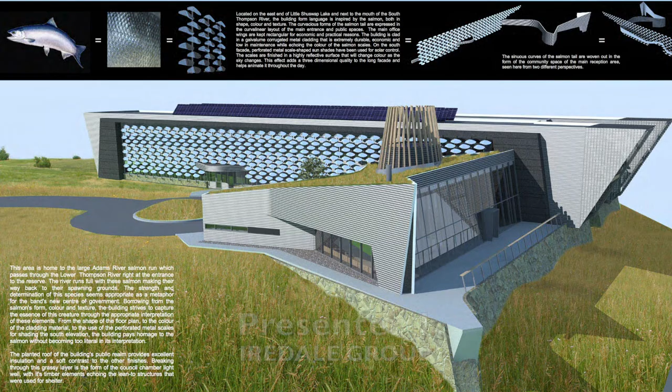I've been working with First Nations for a quarter of a century now. I'm much older than I look.

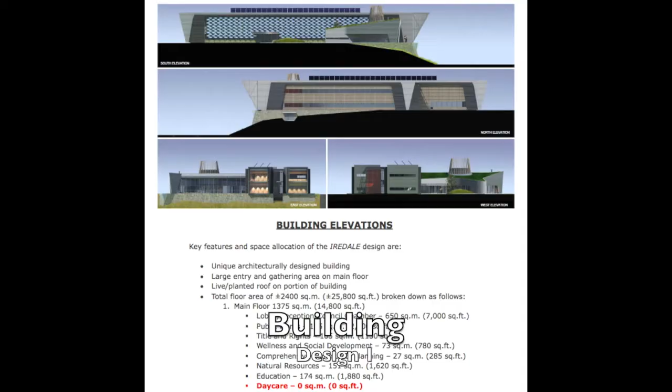We always look for means to develop buildings that have meaning, that are rooted in place, that actually resonate with the community and are drawing their inspiration from something that is particular to that site, that area, and the people. And so when we came to Adams Lake, obviously here close to the mouth of the Thompson River, we all know what the Thompson River is known for, specifically this area.

There's a huge salmon migration up here. What we wanted to do is draw some analogies from the salmon and utilize some of that in how the building took shape, whether it was the form of the building or the texture of the building, the color of the building, anything that we could take and adopt from that.

The picture at the very top, what you can see, there's a black line across the top of the sheet, which essentially illustrates some of the concepts we developed from a salmon.

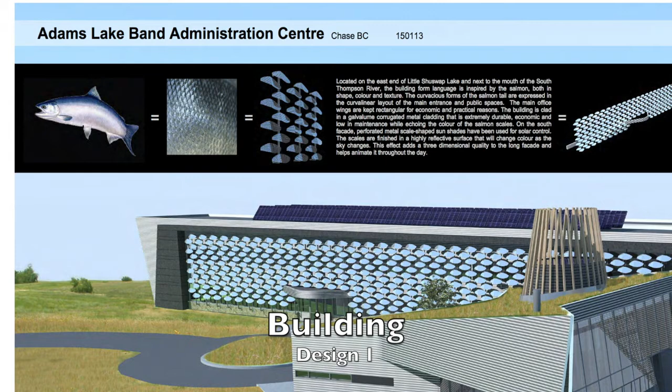And so an administration building is really, it's a bunch of offices and meeting rooms and so forth. And so we have to be in a way very practical about how we lay it out. We have to recognize that in order to be constructible, it has to be fairly straightforward. It has to be essentially in this regard a long box.

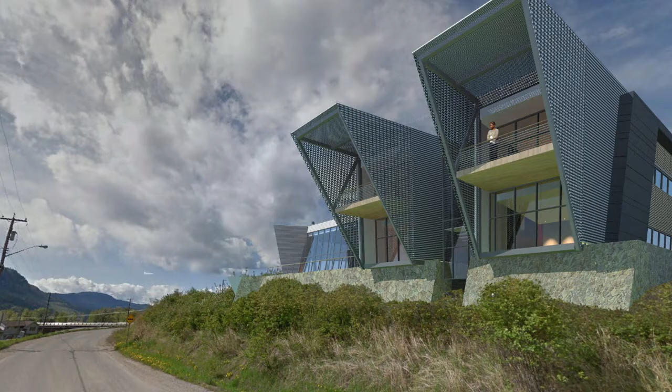And so what we did is we created 2 long boxes that would house the offices, and then as a way to sort of provide some dramatic effect to the building, we created the main entrance to the facility, as well as the council chamber and sort of the main lobby, as this fin that sort of comes out. So we're borrowing from the salmon's sort of sinuous curves.

What we're doing here is the long boxes you see, that represents the offices. And so we thought that most of the building would have to be fairly straightforward, otherwise it becomes way too expensive. And then we would limit any sort of curvaceous form language to the main entrance.

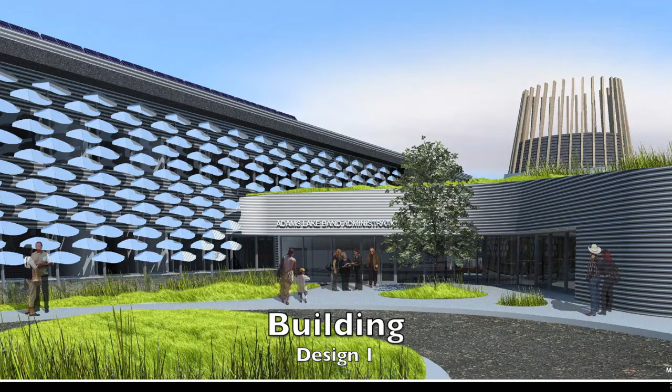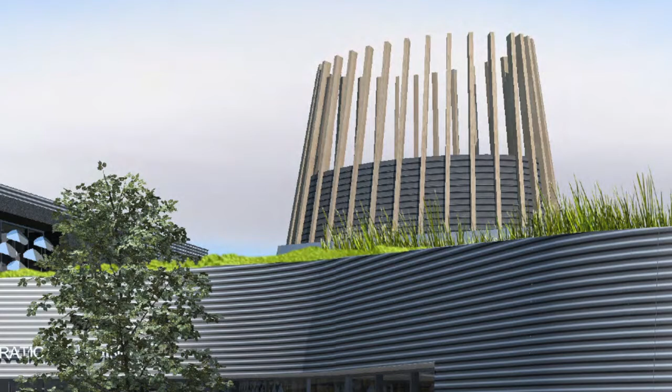And so coming out of the main entrance, and this reverts back to the idea of the subterranean shelters that were fairly common, we're suggesting a sod roof, a planted roof over this area, and then a big skylight coming through, essentially letting light down into the council chamber.

And then, of course, we thought, well, it gets very hot here, as you know. And so we thought, how do we, in a way, simply create a sun-shading device that can reflect perhaps even the scales of the salmon. And so we looked at perforated metal screens. We just bent them in half. And then we put them on vertical sticks, basically on the south side of the building, that shades the whole building from summer heat.

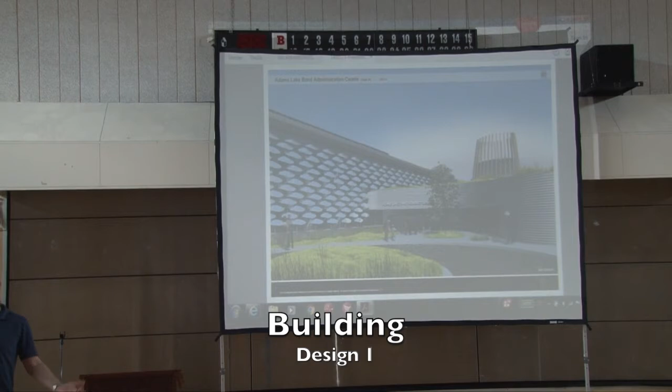Now, obviously, site-specific built buildings are going to be more expensive, and we recognize that. But we design our buildings to last 50 to 100 years. And when council first essentially retained us to come up with this concept, they wanted an all-wood building.

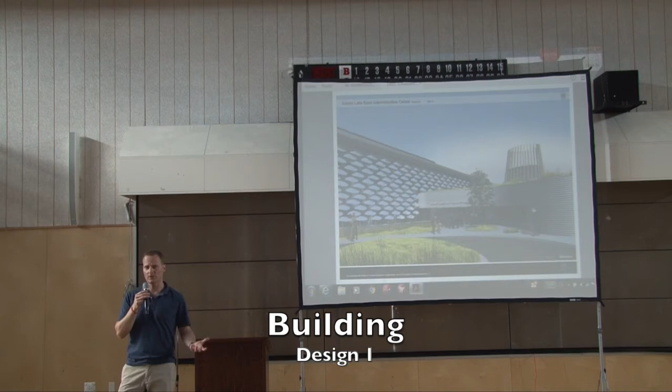And obviously, that's a big push in our province. But we're also very concerned about not giving you something that's going to require a lot of maintenance. And so we are very conscious of cladding the building in materials that were just really, really simple and really durable.

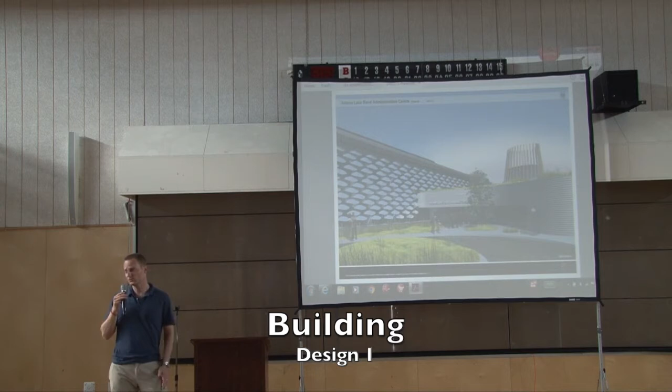Maintenance becomes a really big issue when you have a big building. Obviously for a house, you end up maybe staining it every 10 years or so, but on a building of this size, you really need to think of that. You want something that's not going to be labor intensive.

What this sort of shows you is it sort of shows you the south elevation there. And that's where we wanted to obviously really display, because that would be the main facade you would see as you approach the building. So that we wanted to have the greatest effect, the dramatic effect. So when people are coming to do business, they see a building that is unlike anything else, and it's sort of very specific to this region because it makes obviously some references to the salmon.

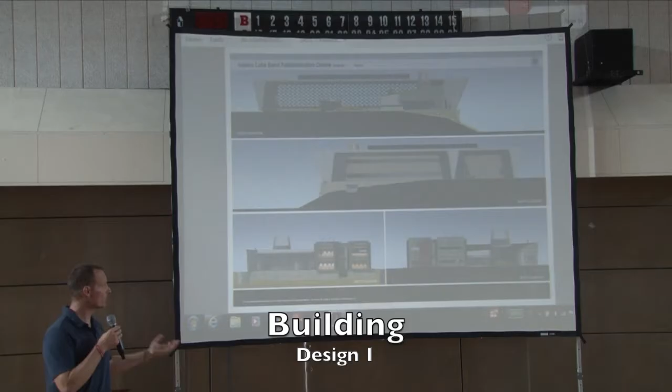So that's sort of what led us in that direction. And then go to the next slide.

Just trying to figure out which order they're in here.

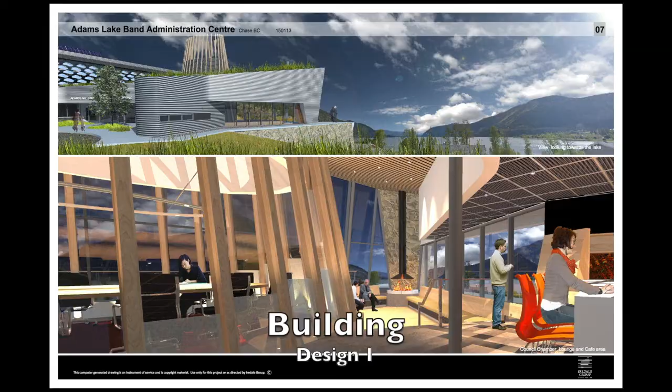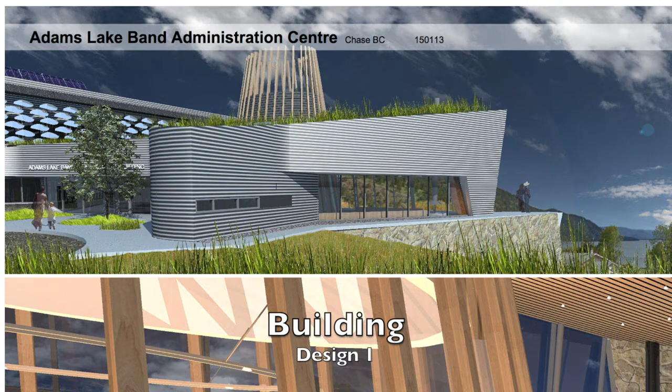On the top there, you can get a sense of what that view would look like overlooking the lake. The building was oriented so that all the public meeting rooms and the chief's office would be located out towards the lake, so everyone would share in that great view.

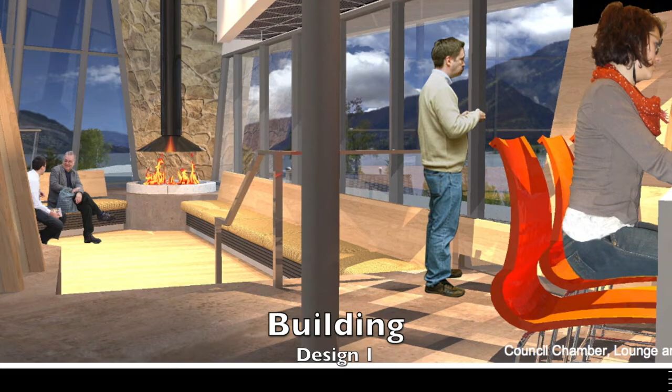At the bottom, the mandate was to provide not only a council chamber, but also a lounge where people could gather for informal dining or get-togethers, with a kitchen off to the side. That space was also oriented towards the lake for great views.

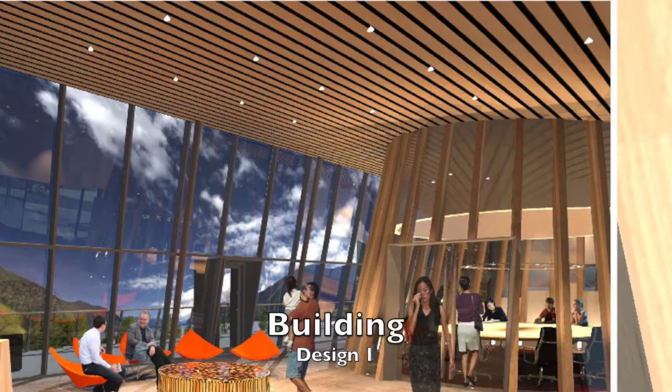Next, this shows an image of what the council chamber could be like, making it high enough to borrow natural light but not direct light down onto the surface. This is an image of the lobby and reception desk.

You can see in that lower photo how you would have glass just opening up right across the lake.

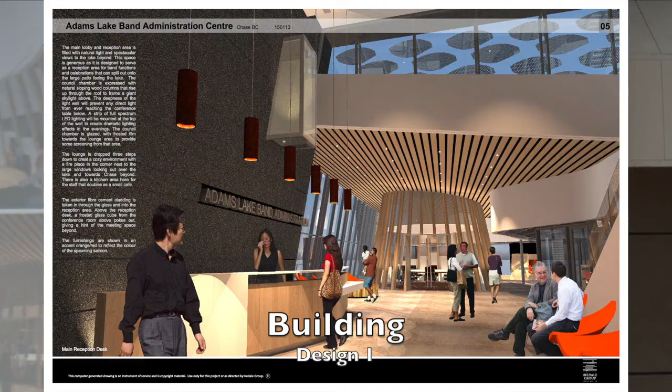This is looking at the reception desk and a glass bay out from the meeting rooms above, then a staircase up, and you can see the council chamber, which we concealed within this colonnade of wood columns.

Very open. Here's an image of what it might look like at the bottom of Lakeview Road - these long shoe boxes coming out, with corrugated perforated metal on the ends to protect them from the sun and give them a little more dramatic flair, as opposed to just a box hanging out at the end.

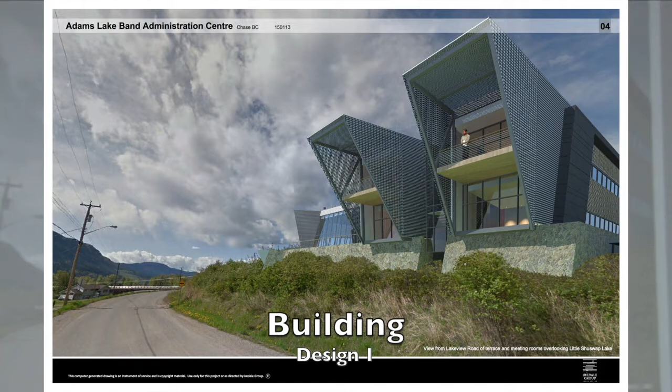We thought we'd put it all on a nice stone base so there's a patio out there, so if you ever had functions you could spill out onto that, overlooking the lake.

You have to think about how these spaces might be used and how they could take most advantage of the site. So the floor plan you can see here is the orientation of the building.

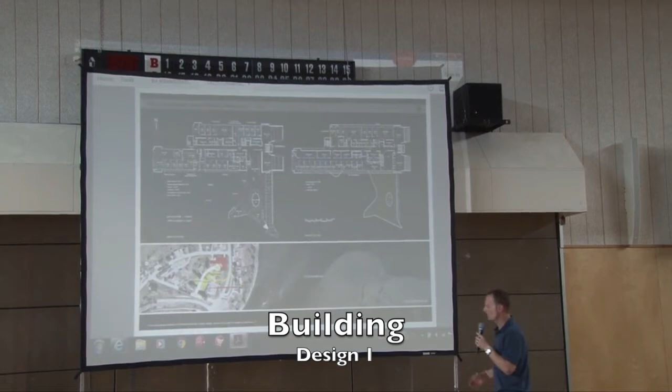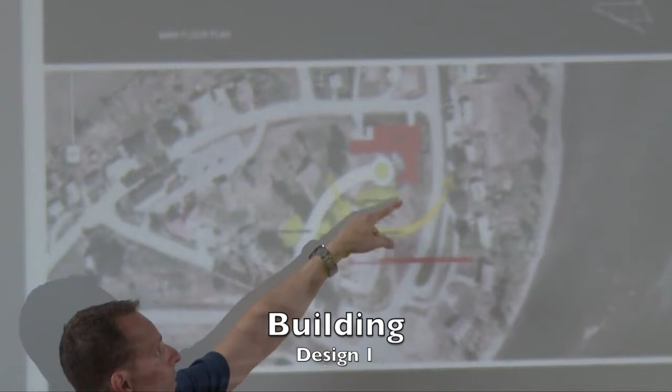The intent was that here's the current administration building, so we'd drive through to provide parking here and there, and this was the one area we identified as possibly free of any grave sites, which was the reason for locating it at that point.

Because of the slope, it also allowed us to provide easy access into the mechanical room and deliveries and storage straight in off the road into the basement, which is very handy.

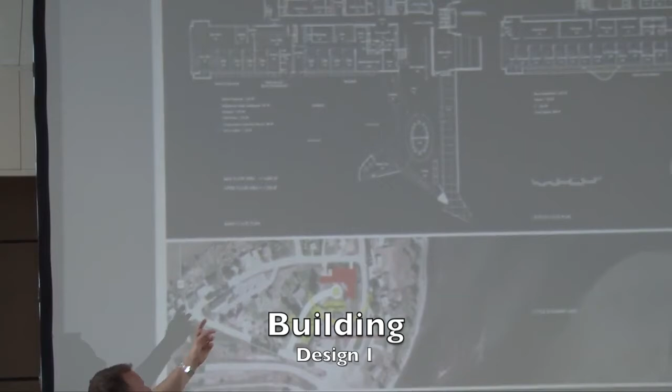Above there you can see the floor plans - two long boxes. They could even be phased depending on how much you wanted to build at once. In that regard, the building is quite easy to extend, elongate, add to, or even subtract from.

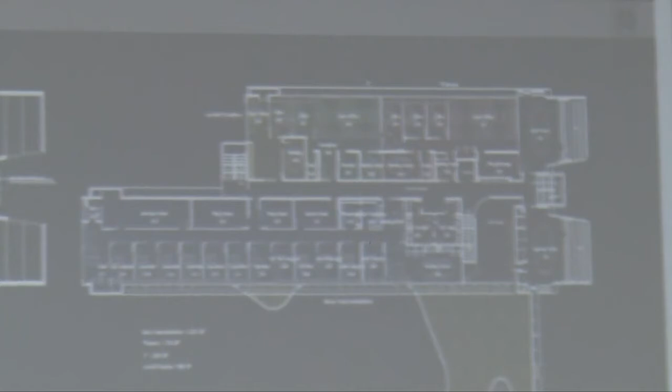And then this being the main lobby entrance area, council chamber, which becomes more organic, again referring more to the sinuous curves of the salmon.

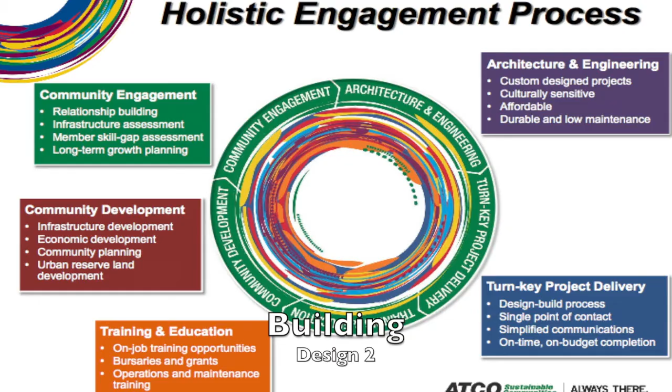I would hope that if we were successful building the band administration office together, going forward there's obviously going to be more buildings you guys need. There's going to be more infrastructure, whether it's commercial development, a gas station, or housing, we can help you with that. We have a whole process that fits with your culture and community, and we'll make it work.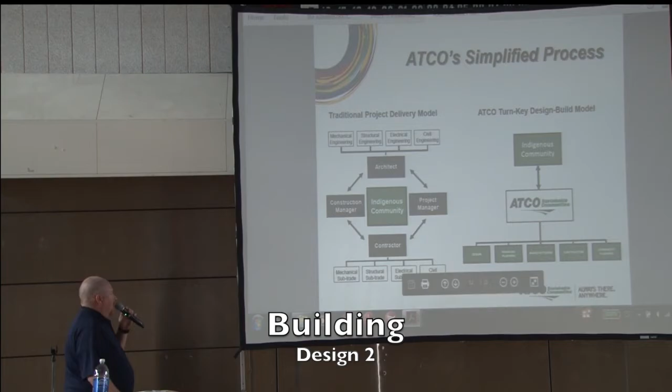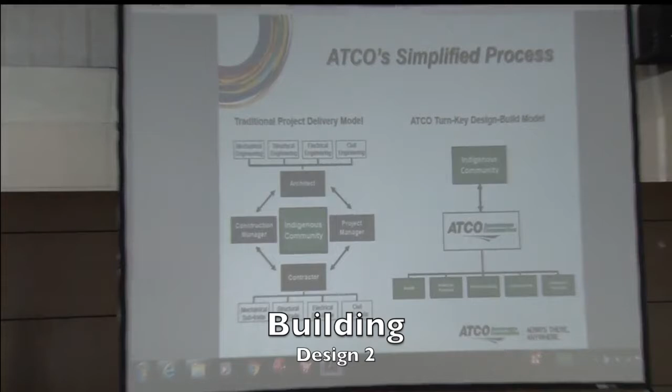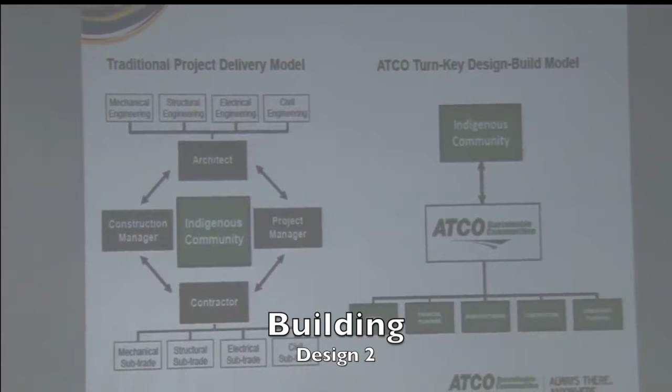This is one of the things that's important to us. When you deal with us, that's who you're dealing with. We're going to look after the design, the financial planning, the manufacturing, the construction, the community planning. If this is a project you take on your own, there are so many variables and sub-trades to deal with, it can be overwhelming and things can fall through the cracks. That's why I think ATCO Sustainable Communities, as a single point of contact, can make the process incredibly easy for you. These are basically everything that we offer.

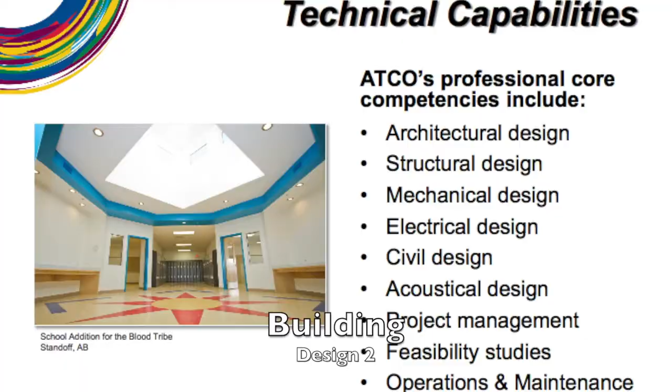Architectural design, structural design, mechanical design, electrical design, civil design, acoustical design, project management, feasibility studies, operations and maintenance. Keep that one in mind, operations and maintenance. A lot of people, when you build a building, there's operational considerations and monies that have to be spent over the years. You have to be very aware of that because you have to find the money somewhere, so you have to plan for it and be ready for it, and we can help you with that.

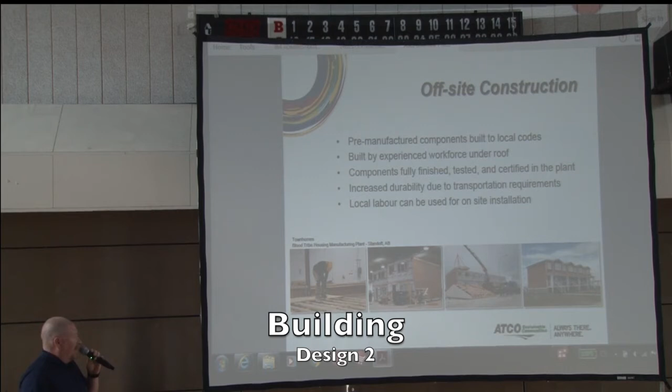One of the keys with us being modular is pre-manufactured components, built to local codes and the design specifications we agree on. We have a very experienced workforce, all under one roof. Our components are fully finished, tested, and certified in the plant. They're built to a higher durability standard because we have to transport them on trucks, so that's going to get us higher quality and a longer lasting building.

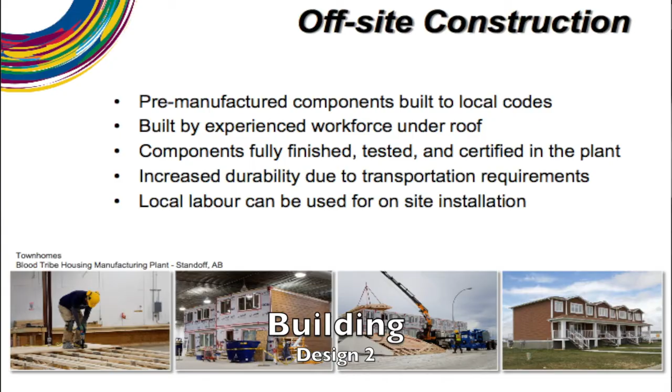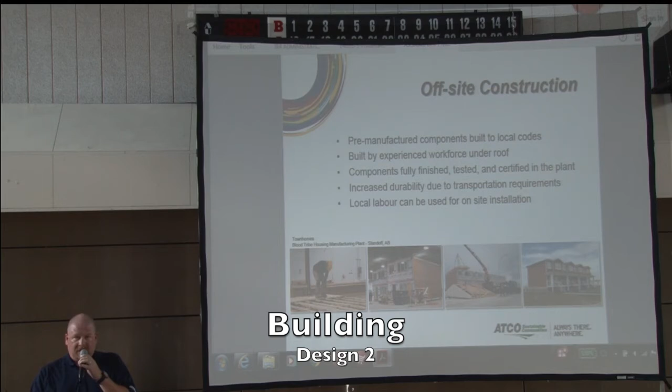One of the other things we truly believe in is using local labor. We're very interested in doing a community assessment with you to find out who's available to work, and we'll do a skills assessment.

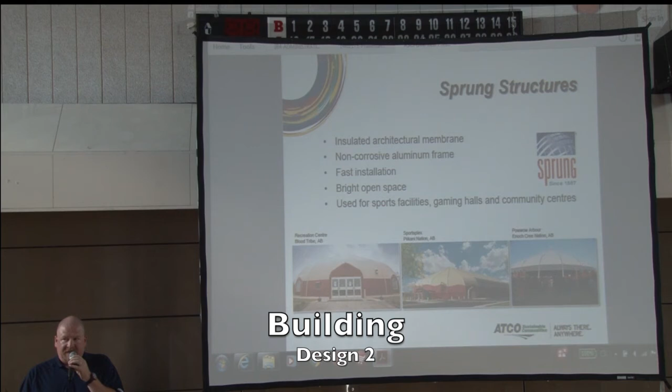In case there's interest in a sprung type structure, we have a joint venture with Sprung out of Calgary, across Canada. Any First Nation who builds a sprung facility on their land, it comes through us. We've done a few, and we're currently finishing a hockey arena for the Piikani Nation, just south of Calgary. I think that's opening pretty quick, it's a pretty exciting building. That's on our website if anybody wants to have a look, it's quite a process.

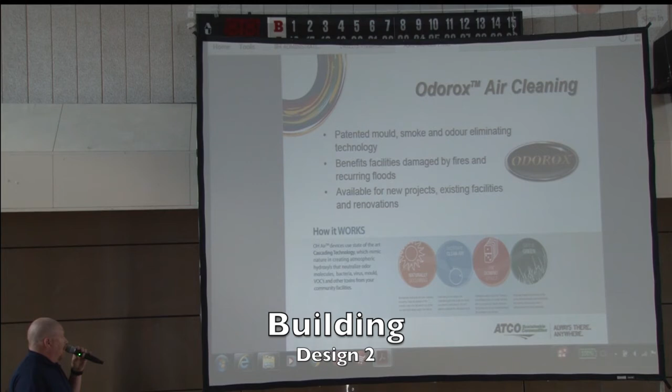Just some of the extras we have: an air cleaning system which we can incorporate into the building, and a mold remediation product that will help us stop mold before it happens, because I know it becomes an issue.

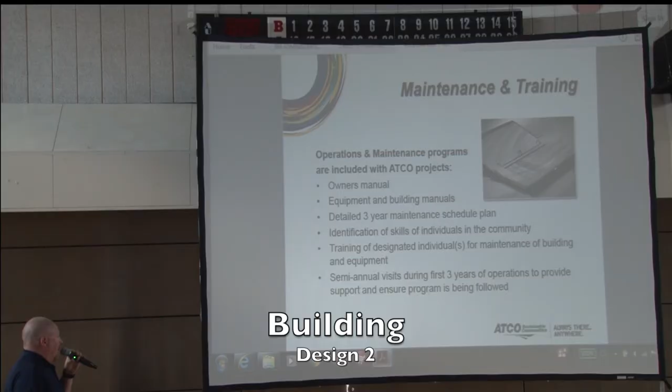Again, maintenance and training, we're big believers in that. We're going to provide you with a detailed maintenance plan and a book so they can go through their daily tasks, weekly tasks, monthly tasks, which is very important to the upkeep of the building.

So again, just to recap: holistic engagement process, a turnkey approach. We have a wonderful celebration and give you the keys, and you're going to have a building that operates the way you expect it to. We want to spend time with you so we understand the community's needs and values, and incorporate those into the process. That's very important to us.

Prefabrication methods give quality and reduced time schedule, reduced weight, and operating and maintenance as we talked about. You get warranty support of a major national company who's going to be here for certainly well beyond my lifetime, and probably most of the people in this room, so we don't have to worry about that.

And that's our recently passed founder, Mr. Ron Southern. So I think that's pretty much it for our presentation.

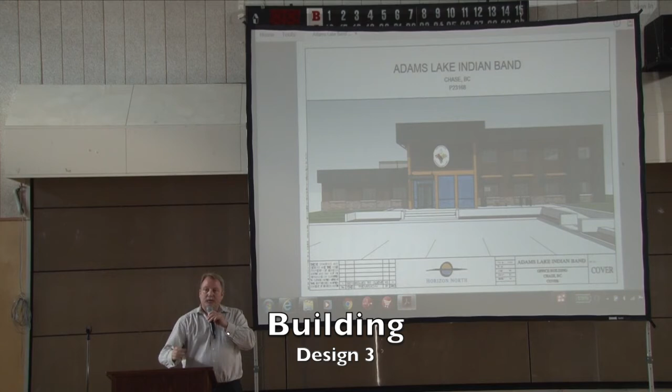Horizon North, I've only been with them a short time, and in that time I found them to be very accommodating in a lot of ways, as I'm sure you guys have found in the dealings you've had with them in the past.

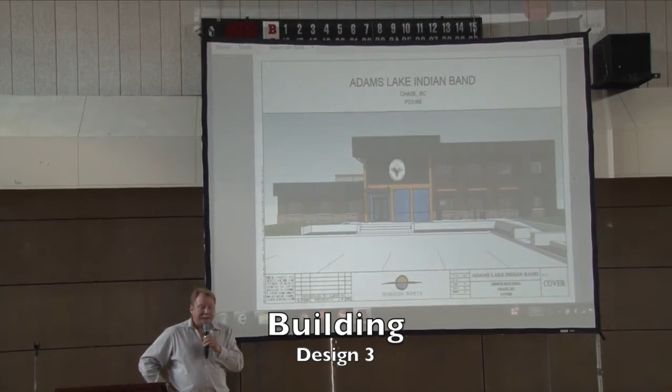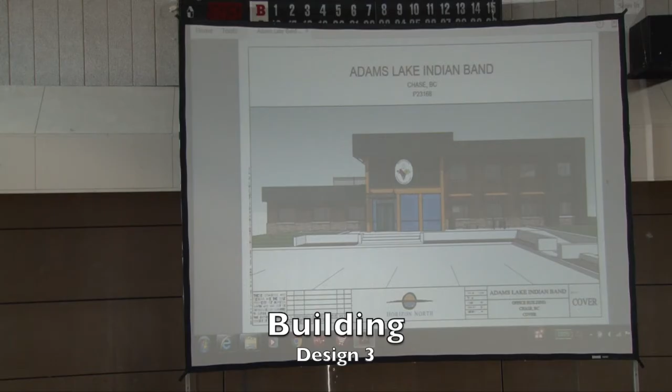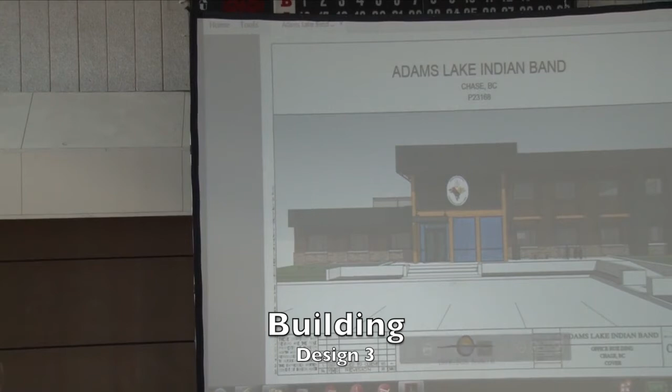So what I wanted to talk to you about today is the building that we had proposed to you. This is it here, this is what the outlook would look like. It has 67 offices, 37 cubicles, 6 boardrooms, 5 bathrooms, and a lounge. Inside that proposal we had it completely furnished for you as well. If you can see on the left-hand side, we actually proposed a patio out on the top of that terrace there. So you have that option if that's something of interest to you.

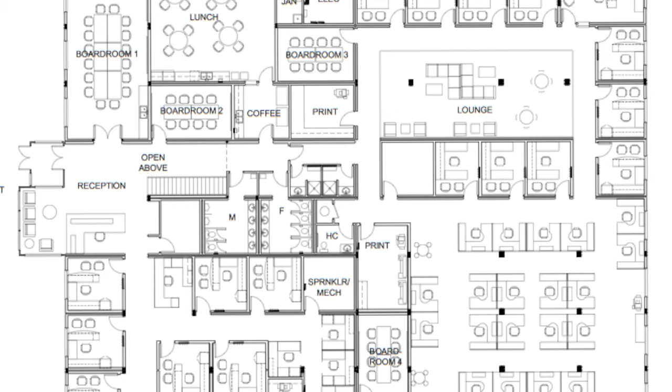If you scroll to the next slide - so the entrance, this is just the layout of it, the entrance and the layout of the main floor. We are local - for those of you that don't know, we're in Kamloops, so we're pretty local to you. We do source some of the product locally as much as we can. Briscoe is where we've used our LVL for our stairs going up to the second floor, so we try to source local as much as possible.

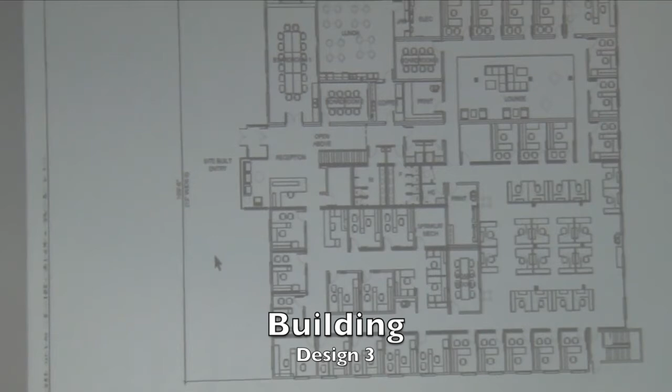As my colleague said from ATCO, the nature of modular construction is two things. It's stronger because we have to transport them down the road - the way we build them for transport, we've literally flown them in helicopters, dangling off the helicopters. You can never do that with a site-built product. So we really want you to understand that the strength is there, the quality is there, because we have quality control checks that go right through the assembly line.

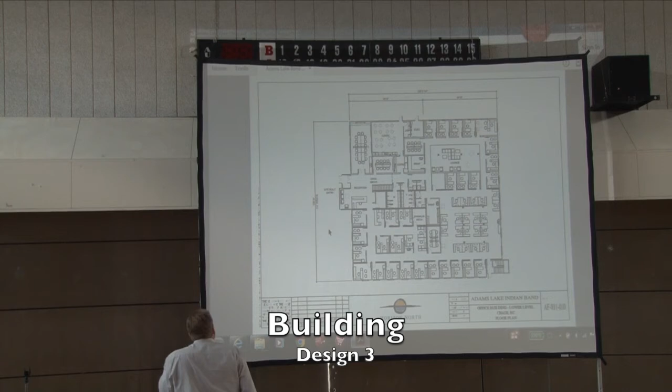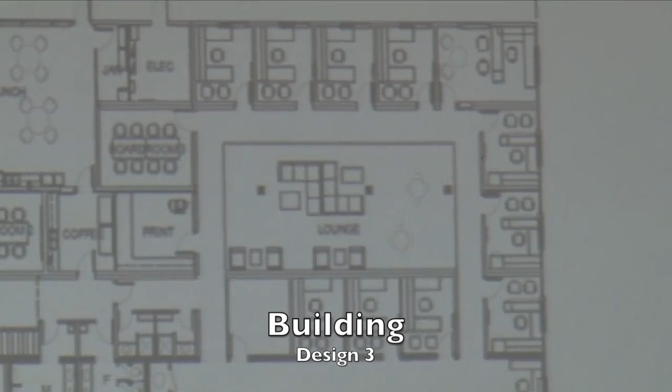He also talks about mold remediation a little bit as well. One of the things you really need to understand is, because it's going through a factory, it doesn't get the climatic weathers that site build does. We wrap it as soon as it gets to the end of the line - it's all tested, wrapped, and then shipped out for transportation. So it's not susceptible to fluctuations of water, snow loads, and absorbing into the wood. We don't have to deal with those issues as much as site build does. So those are some huge benefits when you're looking at your office space.

Can you go to the next one? So up here, the stairwell going up - that's where we talked about putting in a patio for you that could be overlooking the water.

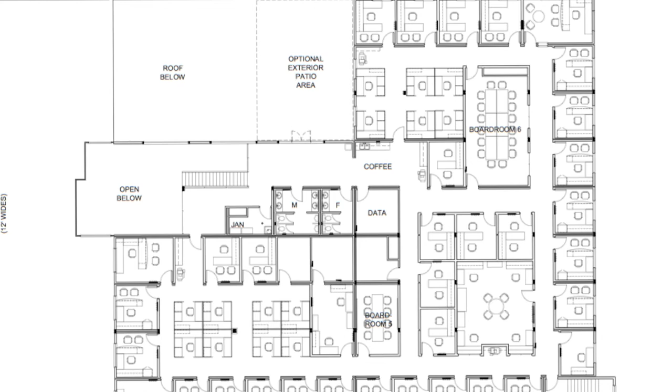This particular building that we built is similar to it - we have some brochures back there for you guys to have a look at and take away. It's similar, but it's not the same. Last year, in 2015, we won the Best Building Award from the Modular Building Institute for all of North America, out of 14 entries, selected by our peers for 27,000 square foot or larger buildings. So we're pretty proud of that award.

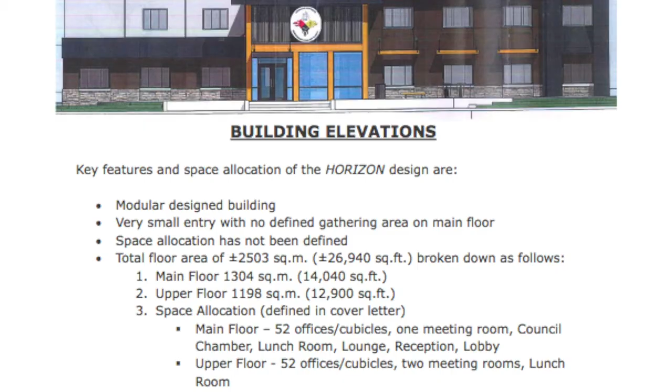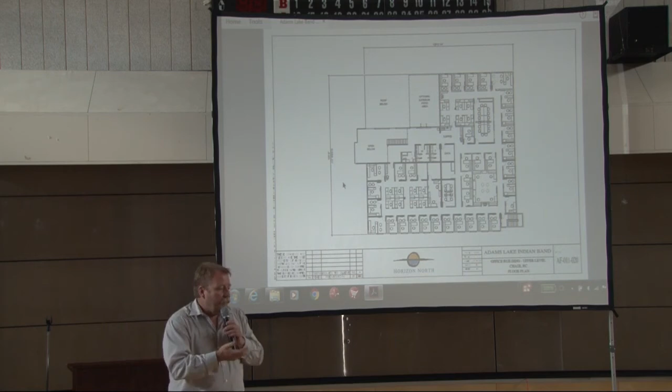I'll wrap up here and try to stay on time for you. If anybody would like to tour our facility in Kamloops, we would absolutely love for you to come through - just get a hold of Sheila or myself and feel free to come tour the facility, have a look, feel, touch, see what it looks like. From there we would build it to your requirements. We have a complete integrated system - a design team, manufacturing facility, transportation with our own trucks and trailers, and our own installation crew, so we can take it right from conception to completion. Being partners, we'd want you to have input on all aspects.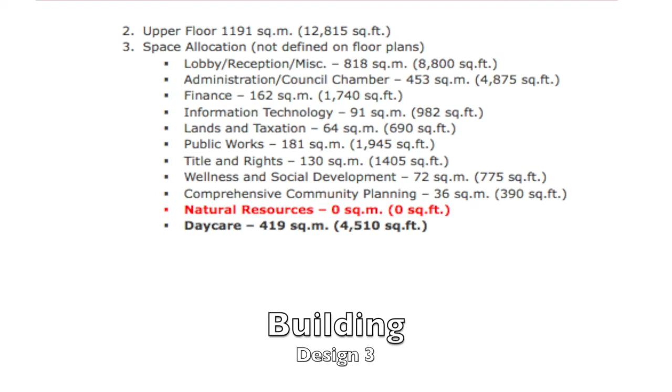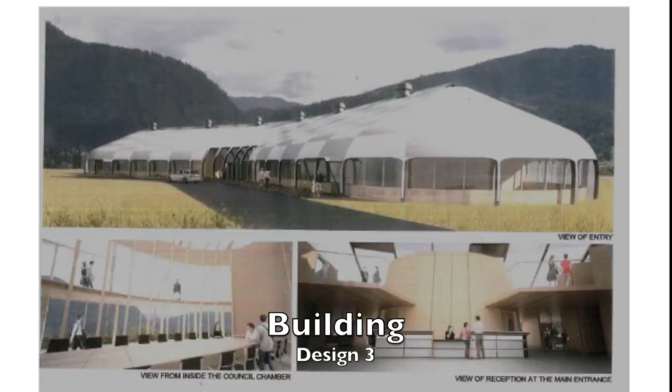The company paid for us to fly over - myself, Mary Ann, Henry Anthony, Howard Nordquist, and Hat Pooley. They toured us on their buildings in Saskatchewan and one in Calgary. We spent one night, did about 4 flights in a day and a half, and came back. Unfortunately they don't have the presentation, but they have a similar design where you can move anything around and configure the inside of the building however you want. The only thing missing would be the natural resources building inside that. The roof was guaranteed for 25 years, so you can put lights and skylights up there too.

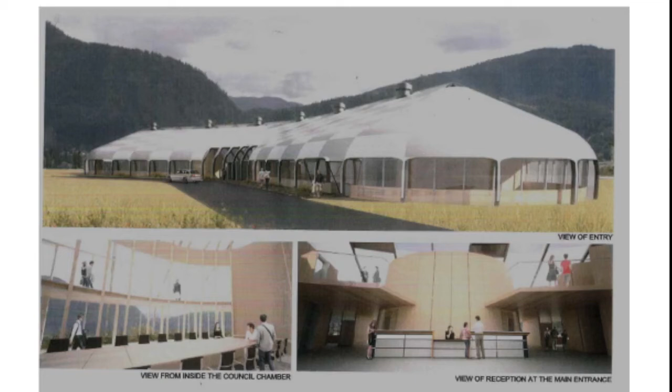They left us information, so if you want it you can look on their website, we can provide that as well. It's too bad they're not here to ask questions of, but we can get a hold of them. Thanks, Jeff.

So what we'll move into next is the different building sites. We'll have Iva and Keaton give an overview of all the sites that we looked at, part of the original design at the corner of Lakeview and Village.

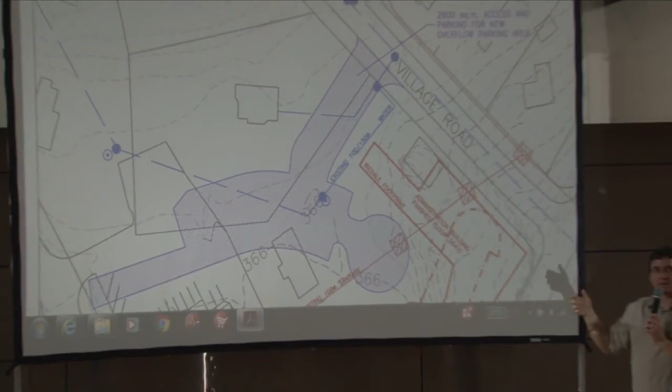Again, this is a detail of option 1, and I think since this initial design was done, they've done a ground penetrating radar survey. I think a lot of the area in purple, and even part of this building site, has been identified as very highly significant, so there was concern that there would be issues building there.

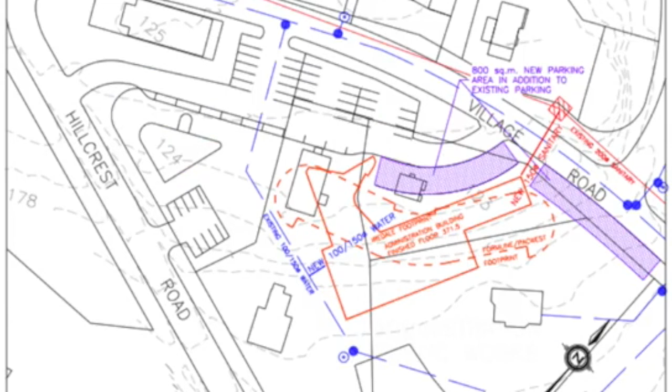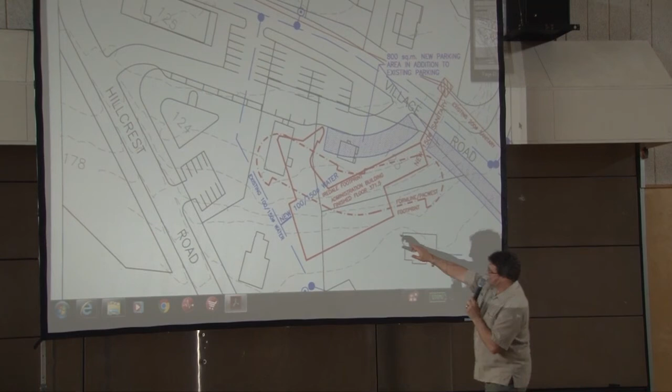Option 2 is the site that has the existing community hall, or the old community hall, and the language nest house - this is basically the existing band, the old band hall, and the language nest, the little square building there. Because it's located beside the health center and the old band hall, there's actually quite a bit of existing parking. So what we felt was that the purple area would be additional parking, but there wouldn't have to be a lot of new development.

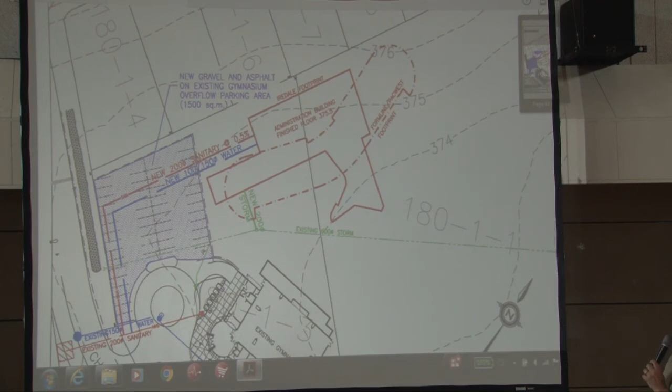Option 3 up at the top is basically the area just above the gym here. This is the gym, and up above the main paved parking is actually a graveled parking lot that was done when the gym was built. In that case, because it's already been readied for parking, it would be fairly easy to make that into new paved parking and then bring water and sewer to it.

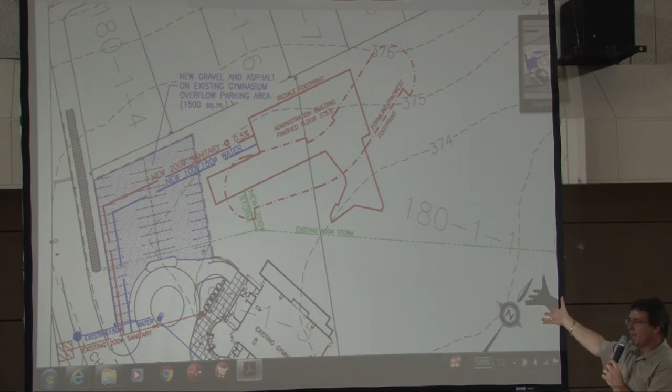One issue with this is that this parcel is actually part of the school lot - there's 5 acres assigned to the school. So if there was a design that encroached on the school land, there may have to be some makeup lands provided to the school if that option was selected.

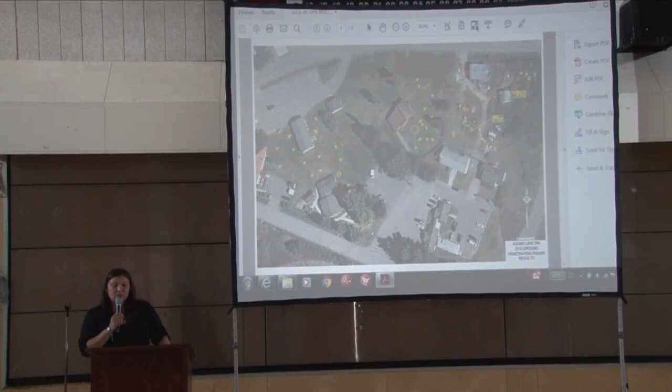This will be presented by Jerry Andrew. So Gentech Engineering was hired by the band, funded by Indian and Northern Affairs Canada, to do a burial site reclamation. As part of that project, we did some ground penetrating radar.

How do you identify all the potential sites in this area through the administration area? We hired a company to basically penetrate the ground with sonar radar, and they came up with potential areas that were disturbed, different from the natural soils and everything.

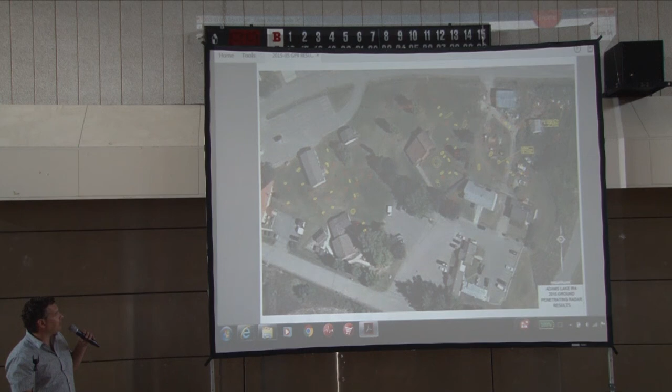As you can see on the map, all the areas in yellow are potentially disturbed sites. There's a lot of areas identified around the existing buildings. Even up where the natural resource building is, you can see where there's a circle right there, and some of the other equipment there with the school and stuff. So even though it's been a few years, that stuff showed up on the radar.

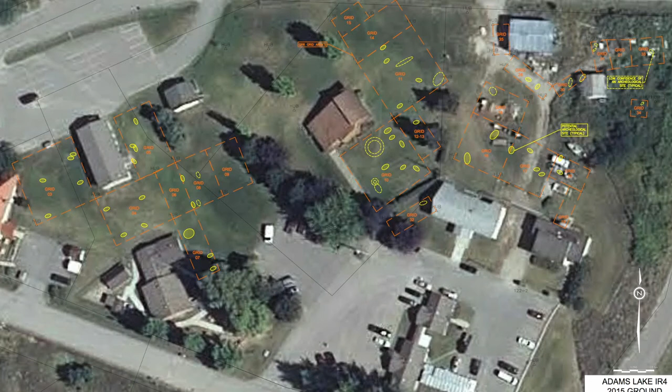That wraps up the ground penetrating radar presentation by Jerry. The next presentation will also be done by Jerry, and it's the burial site reclamation. This project has been underway a couple of years, funded by Indian and Northern Affairs Canada.

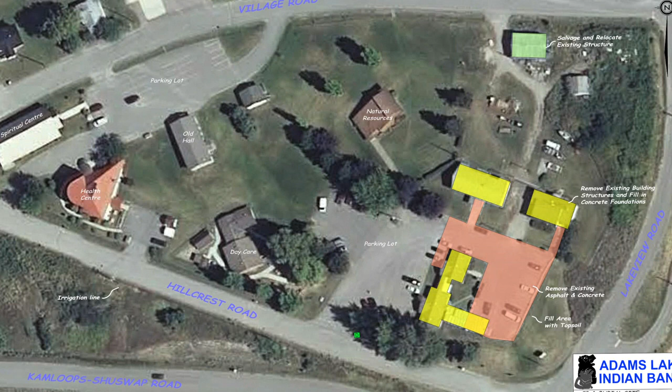The existing buildings, in yellow, would be demolished - the top structures would be removed. The area in pink would be the asphalt and concrete, all of which would be removed and hauled off site.

Option one would be basically taking the area and filling it with topsoil and seeding it, planting a few trees, and building a sidewalk around there so vehicles don't drive over it or anything like that.

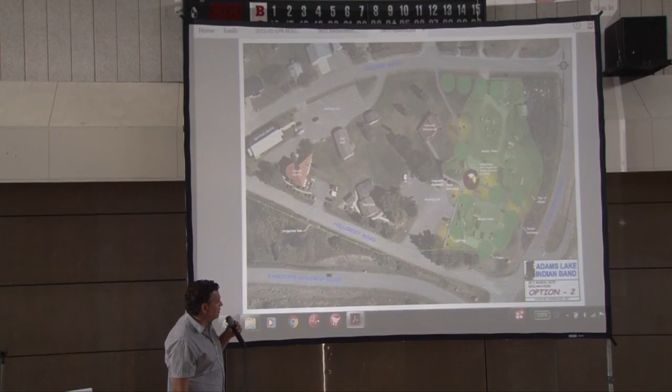Option two is basically the same as option one, but adding an asphalt pathway from where all the kids and stuff travel now.

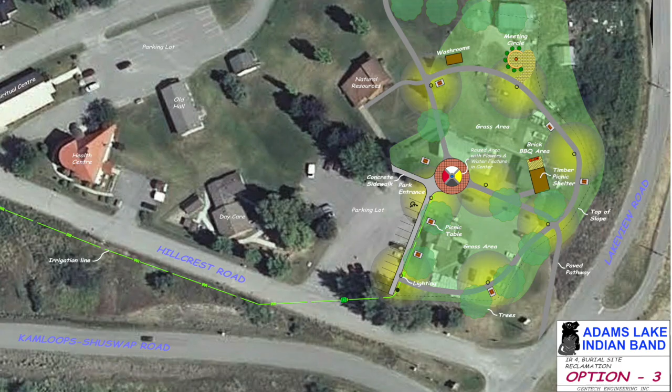Option three is the next drawing, and this adds quite a few more options to the area - additional pathways, additional lighting, park benches, and community facilities.